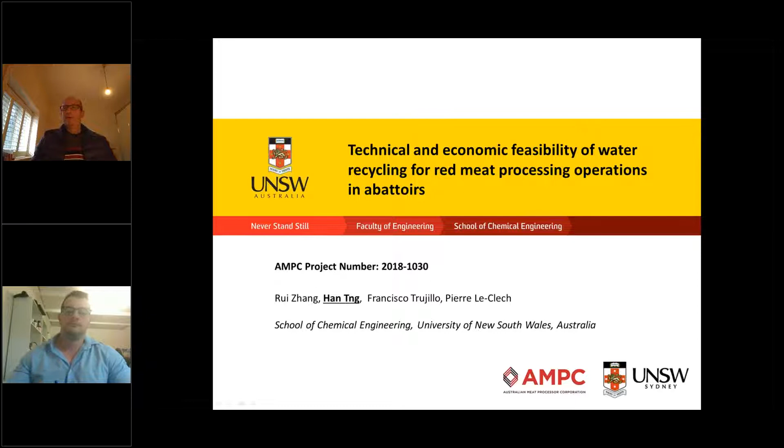So our first speaker is Dr. Han Tng, so I'll hand over to Han. Thanks, Matt. Hey everybody, I'm Han from UNSW, and I'm presenting some of the findings and outcomes from our project, which looked at the technical and economic feasibility of water recycling in red meat processing abattoirs.

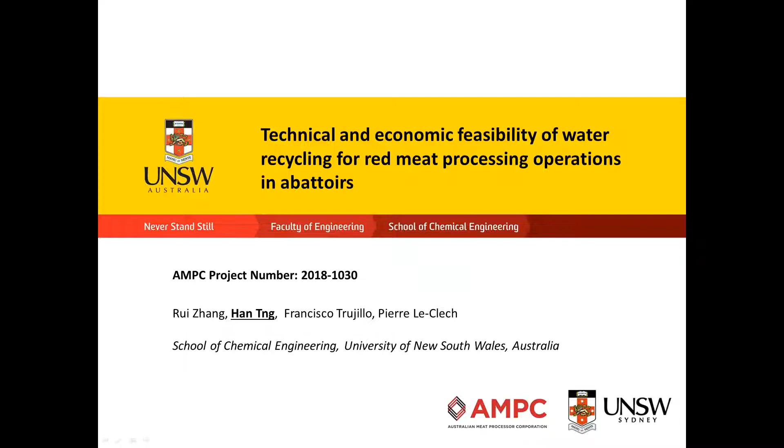The Australian red meat processing industry uses large quantities of water to maintain high levels of sanitation. Potable water is used throughout the various stages of meat processing, ranging from washdown of stockyards all the way to rinsing of final meat products. Due to this, in times of drought, meat processors are often perceived as overusers of water, increasing potable water costs and thereby increasing tensions between red meat processors and the local community over consumption of potable water.

Therefore, the aims of this project are to provide red meat processors with recommendations to reduce potable water consumption via the identification of waste streams suitable for recycling or reuse, as well as assessing its technical, environmental, and economic feasibility.

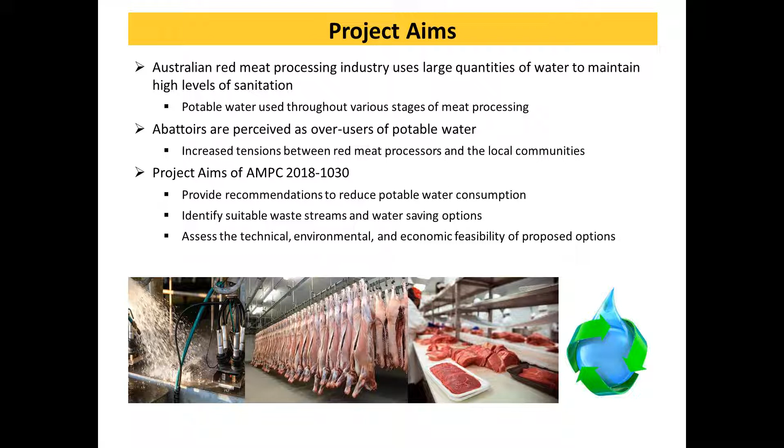The project was broken down into four milestones. Milestone 1 was first to collect abattoir operational data to establish the current volume of potable water consumed as well as its costs. This was achieved by a survey sent out to participating processors, as well as site visits and interviews. Milestone 2 was then to identify the quantity and quality of the abattoir waste streams before selecting streams most suitable for reuse or recovery.

Milestone 3 then looked at pairing the selected waste streams with proposed treatment trains to assess their technical feasibility through microbial risk assessments, BioWin, and WAVE RO modeling. Milestone 4, the last milestone, was then to assess the economic and environmental feasibility, achieved through a comparative life cycle assessment as well as net present value and ROI assessments.

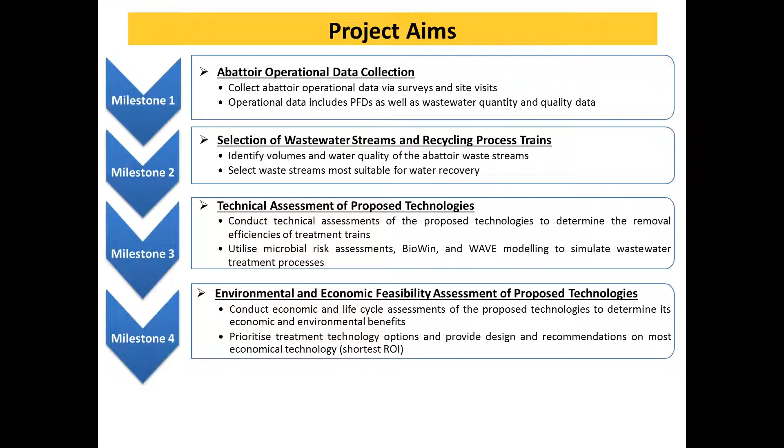As previously mentioned, Milestone 1 looked at data collection through a survey as well as site visits and interviews. Through the site surveys, we collected operational data such as potable water consumed on site, together with economic information such as trade waste and potable water costs. Visits and interviews with abattoir personnel were also used to collect process flow diagrams, piping and instrumentation diagrams, and site-specific information.

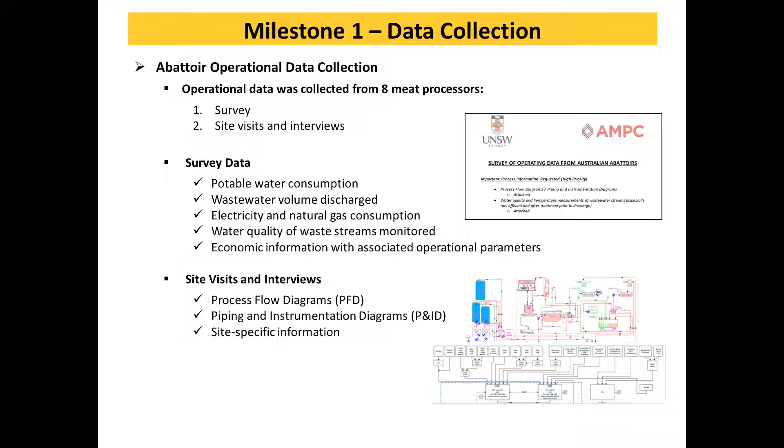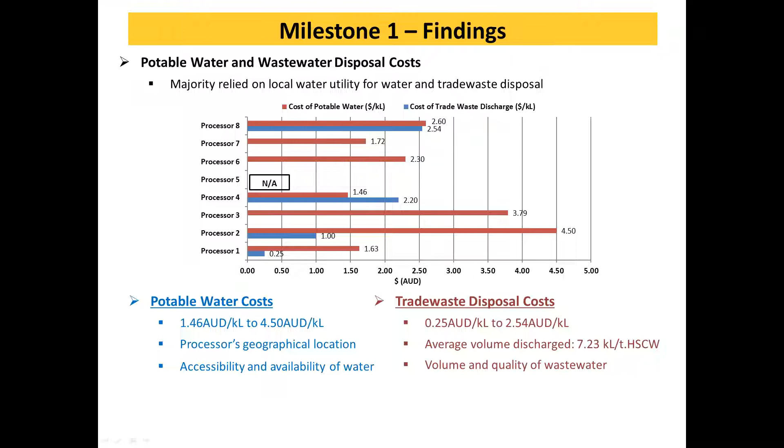From the interviews with participating processors, it was clear there were growing concerns regarding the increasing cost of potable water due to decreasing water availability. This highlights the need to explore water reuse and recycling options, where every percent of water saved counts significantly. Recovering 1% of water will save approximately 9,600 kiloliters a year, which amounts to $28,000 at the current potable price of $2.98.

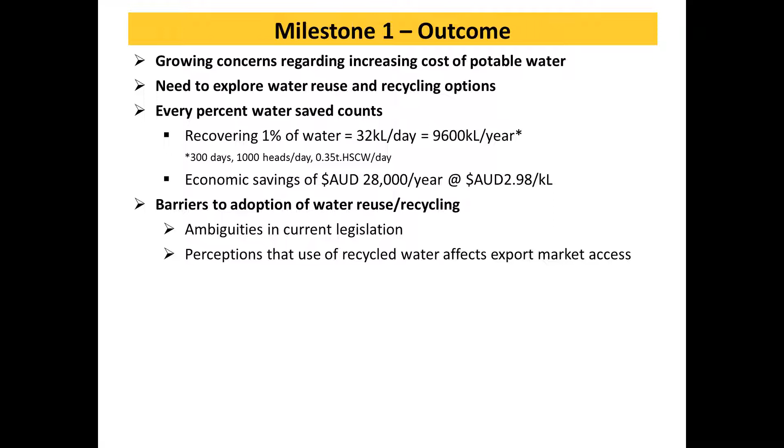However, from our interviews we also noticed there's a massive barrier to the adoption of water recycling and reuse, due to inconsistencies in the current legislation, resulting in a perception that processors' export market access would be affected should they choose to use recycled water in their abattoirs. That's most probably the reason the industry is reluctant and hesitant to consider water recycling or reuse.

So we actually reviewed the relevant legislations: AS 4696, the Food Standards Meat Notice 2008, the MICOR from the Department of Agriculture, as well as Codex. There's no evidence that recycled water is prohibited in meat processing, as long as they comply with the Australian Drinking Water Guidelines.

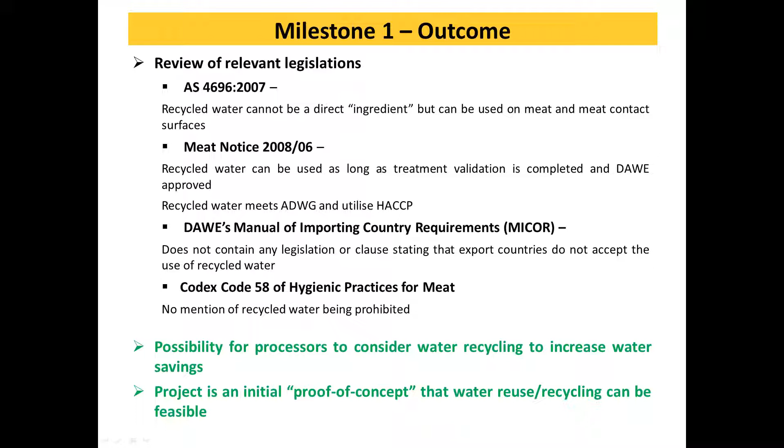This further highlights the possibility for processors to consider water recycling to increase their water savings and improve their water stewardship. Findings from this project can also act as a proof of concept that water recycling is technically feasible, as long as they stay compliant with the relevant legislation.

Moving on to Milestone 2. Milestone 2's aims were to quantify the volume of wastewater produced by each abattoir process, establish the water quality of those waste streams, as well as select waste streams most feasible for reuse or recycling.

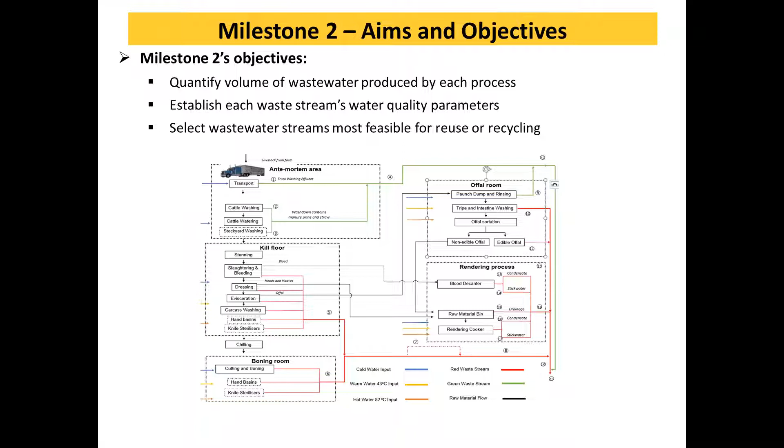As you can see from this process flow diagram, there are many different waste streams generated from an abattoir process. We faced a few limitations and challenges, one being that abattoirs do not properly meter their water or their processes, so it's difficult to actually collect water quality data as well as flow data.

Wastewater generated from individual processes was not segregated; often they were commingled and sent down the same drain. As such, only limited water quality parameters were monitored, and most of it only focused on the treated effluent for trade waste and disposal compliance.

As part of Milestone 2, we had to review the data collected from Milestone 1 and look at existing literature and previous studies to fill the gaps, before starting step 2: ranking the waste streams based on volume and water quality. We wanted to focus on streams high in volume and low in contamination, as those are easiest to treat and have the most opportunity for reuse and recycling.

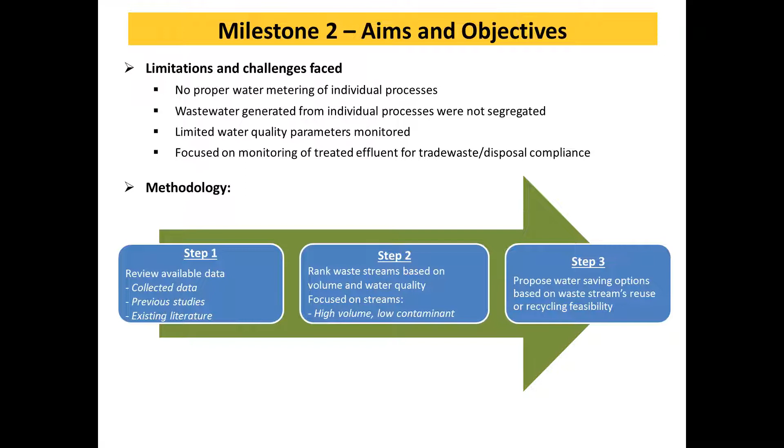So we ranked all the waste streams from the different processes in an abattoir. This ranking identified the kill floor as the largest producer of wastewater, contributing 27% of the total wastewater produced, followed by the stockyard wash and combined stick waters. However, of these three, only the kill floor waste stream was deemed suitable, due to its contaminant strength.

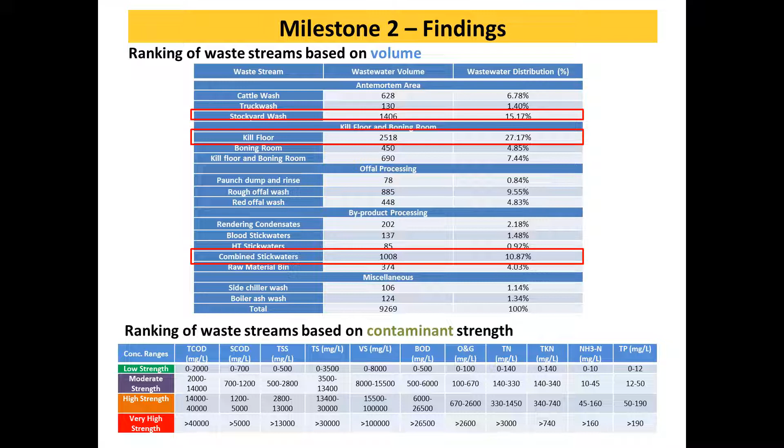And that's what we actually developed, a ranking system to basically score each individual stream based on its volume and strength. From the scoring system we developed, we ranked and found that the top 4 streams most feasible for reuse or recycling were the boning room, side chiller wash, kill floor, and boiler wash waters. The full ranking and more details can be found in the AMPC report.

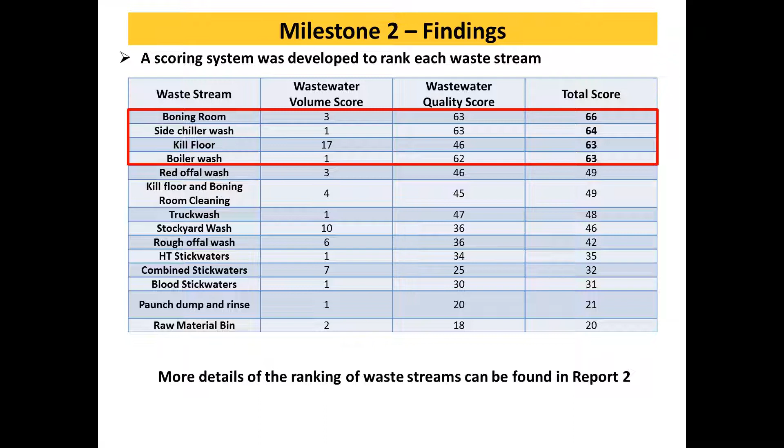So with the waste streams selected from Milestone 2, Milestone 3 was then to propose and select 3 water reuse or recycling options. The 3 options we proposed were: option 1, direct reuse with minimal treatment; option 2, recycle to a non-potable Class A standard; and option 3, recycle to potable water standards.

These options were then evaluated based on a quantitative microbial risk assessment to establish the log removal values required for treatment, as well as a multi-criteria assessment to select the best treatment train for each option. 2 modeling softwares were used as well: BioWin and DuPont WAVE, to help determine the removal efficiencies of the treatment processes.

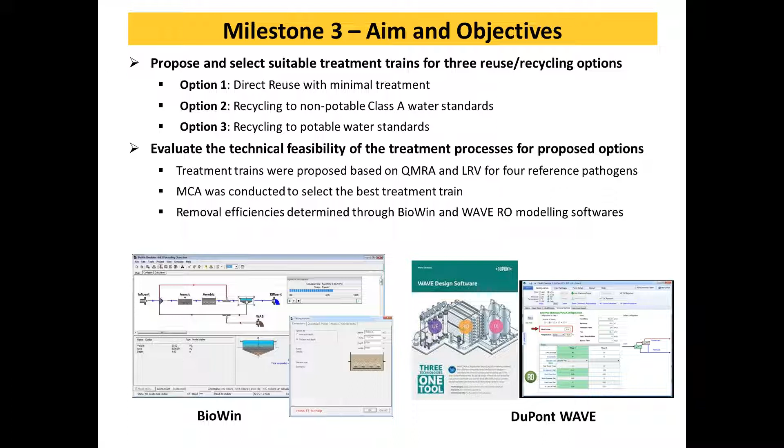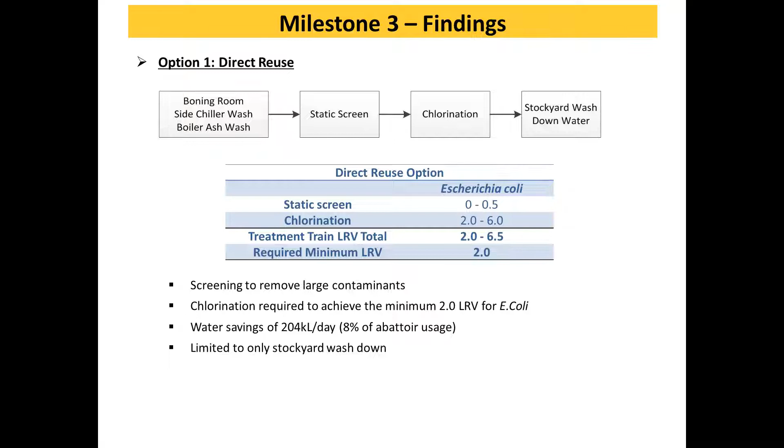Option 1, direct reuse, looked at reusing wastewaters generated from the boning room, side chiller, and boiler wash directly as stockyard washdown water. Given the low amount of contamination in these streams, the process only required a screen for removal of large solid contaminants, followed by chlorination to achieve the minimum 2 log removal values for E. coli. This option could yield savings of about 204 kiloliters per day, about 8% of the abattoir's daily usage. However, this has limited use as it can only be used as washdown water in the stockyard, so it cannot be used anywhere else.

Option 2 was to treat the kill floor wastewater to a Class A non-potable standard, achieved through a membrane bioreactor and chlorination as the final disinfection step. Briefly, conventional activated sludge is used for nutrient removal, followed by a solid-liquid separation step by settling. An MBR, on the other hand, which is what we propose to use, essentially combines the conventional activated sludge and settling process into one using ultrafiltration membranes as well. This not only reduces the process's overall footprint but also improves the pathogen removal efficiency, allowing the treatment train to achieve the required LRVs for non-potable Class A water production.

It should be noted that while MBRs are more compact and efficient, they are also susceptible to oil and grease. Therefore, proper water quality sampling will be needed prior to adoption of this technology. A potential way to solve this issue was to have a save-all tank used upstream of this treatment process for flow balancing as well as removal of oil and grease.

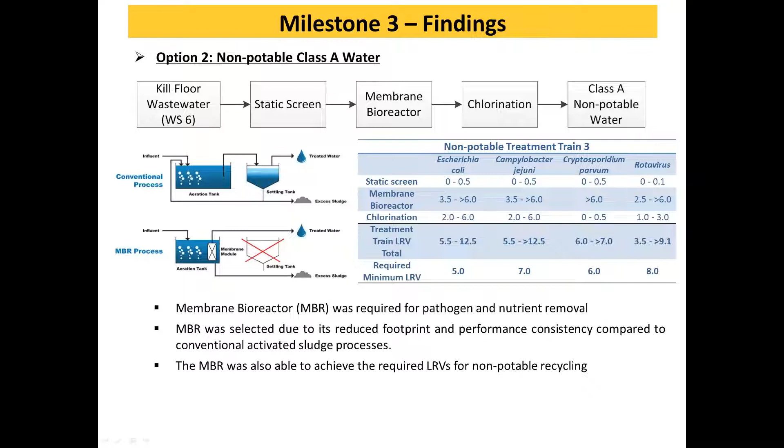For option 2, we used BioWin modeling to simulate a membrane bioreactor to establish its removal efficiencies. The modeling results demonstrated that an MBR was capable of producing non-potable Class A water. As you can see, the MBR effluent achieved the Class A standards, in fact surpassing them for BOD, total suspended solids, nitrogen, and phosphorus. This treatment train was capable of producing 719 cubic meters a day of Class A water that succinctly met the abattoir's non-potable needs.

Although this option can yield significant water savings, it's limited to processes that utilize Class A water, which tends to be washdown waters as well as other plant amenities. Therefore, it does not have as much utility compared to potable water.

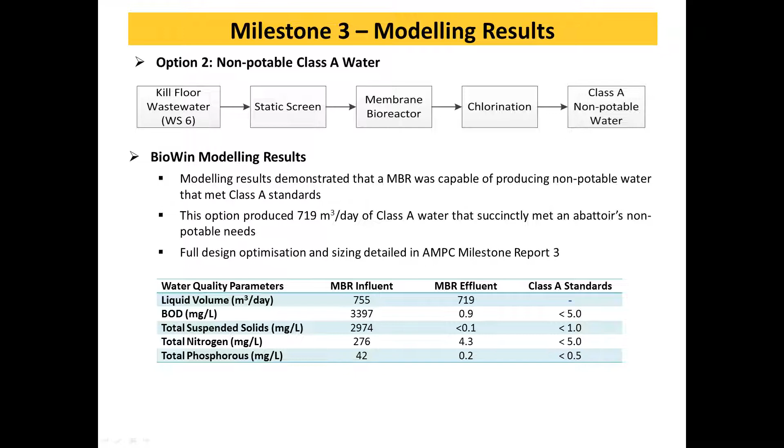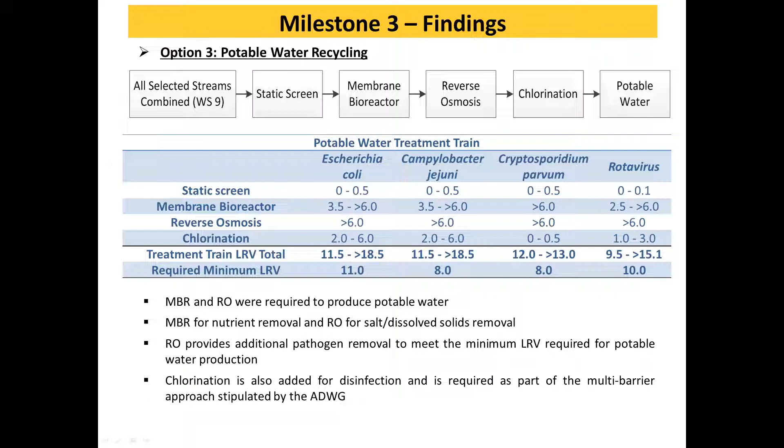Option 3 was to recycle all the selected waste streams to potable water standards. Again, that involved the use of an MBR for nutrient and pathogen removal, followed by an RO membrane for dissolved solids removal. The RO unit also provides an additional barrier to pathogens, enabling the treatment train to surpass the minimum required LRV for drinking water. This is also part of a multi-barrier approach, required by the Australian Drinking Water Guidelines, with chlorination also used as the final disinfection step.

Again, we used BioWin modeling to show that the nutrient removals were achieved, and the WAVE RO modeling software was used to design and size an RO system. The modeling results showed that to achieve a recovery of 88%, a two-stage RO system with concentrate recirculation was required, and that was able to produce 1,023 cubic meters a day of potable water, which accounts for close to 32% of an abattoir's daily potable water requirements.

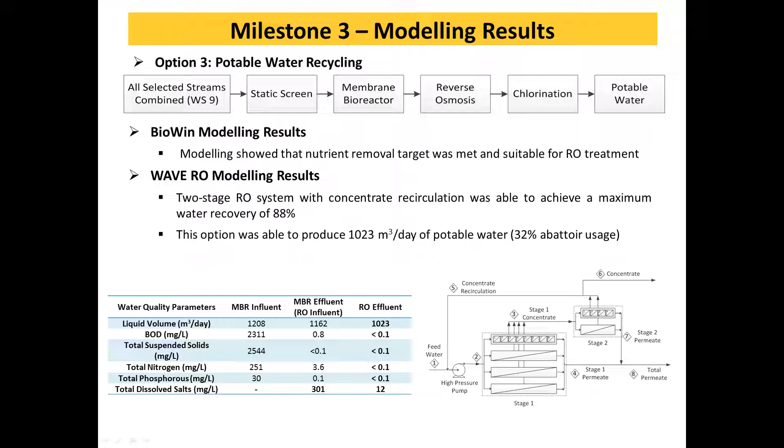Given that potable water can be used in a wide range of abattoir processes, recycling wastewater to potable standards would allow processes to achieve the most significant water savings. So with recycling waste streams to potable standards being the best option to achieve significant water savings, a comparative LCA was conducted to evaluate the environmental impacts attributed to the adoption of potable water recycling.

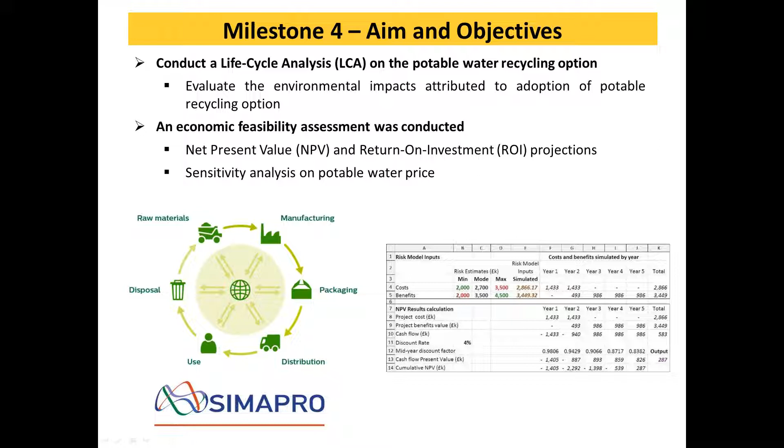Subsequently, an economic feasibility assessment was conducted to assess the economic viability of the water recycling options, where a net present value over a 15-year time period with an ROI projection advised on the capital payback period. A sensitivity analysis was also conducted to look at the impact of potable water prices on the projected NPVs and ROIs. As part of milestone 4, we looked at 3 different scenarios.

Scenario 1 was the base case where no recycling is considered. Scenario 2 was the case where internal recycling was adopted, involving treating the selected waste streams via the proposed MBR and RO unit to produce potable water. Scenario 3 was the case where end-of-pipe recycling was considered, which differs from internal recycling in that the abattoir's wastewater is first treated by the local utility's wastewater treatment plant for nutrient removal, followed by an additional ultrafiltration and RO membrane used to treat the water to potable standards and recycle.

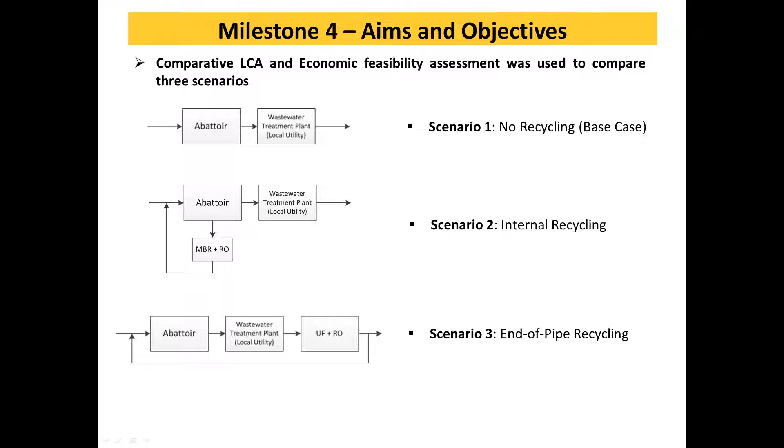Very briefly, the comparative LCA assessed each scenario across 10 different environmental impact indicators. A decrease in impact score indicates an environmental benefit, while an increase in impact score indicates an environmental burden. Changes in impact scores that exceeded 10% were deemed significant, with anything less than 10% considered insignificant and not considered in the study.

Based on our results, internal recycling showed significant changes in 6 impact indicators, while end of pipe resulted in 4 significant changes. Regardless of recycling configuration, recycling of water generated an environmental benefit for 2 impact indicators: mineral resource scarcity and freshwater consumption, which was obvious due to the reduction in water extracted from the environment and the subsequent impact.

However, internal recycling did contribute to more of an environmental burden due to the increased energy consumption and sludge production associated with the use of the MBR for nutrient removal. End of pipe, on the other hand, did not have that because it relied on the conventional wastewater treatment plant run by the local utility for nutrient removal.

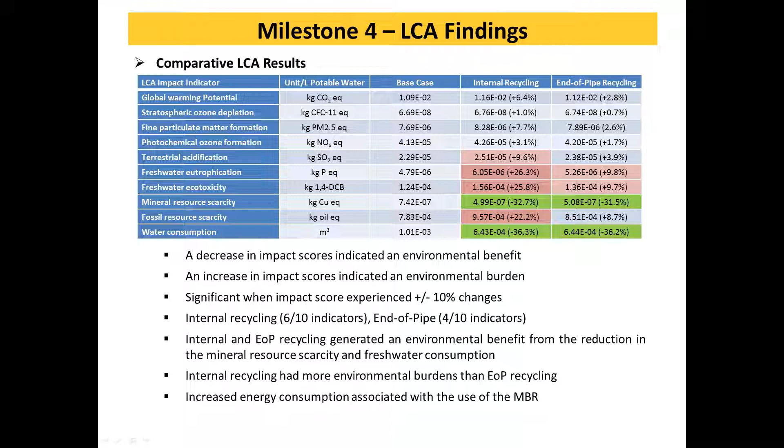Moving on to the economic feasibility, the total capital investment costs for both internal and end of pipe recycling were estimated based on CapEx values obtained from wastewater treatment case studies. Working capital was assumed to be 15% of the fixed capital investment. The total CapEx for internal recycling was estimated to be close to $3 million, while end of pipe recycling was found to be around $1.7 million. This shows that internal recycling was more capital intensive as it required a dedicated MBR for nutrient removal.

However, this translated to a reduction in operational expenditure due to lower trade waste disposal volume. As you can see here, when it comes to operational expenditure, internal recycling had a lower OPEX of around $400,000 a year compared to end of pipe's $820,000 a year. Again, that was due to the fact that internal recycling was not reliant on the utility's conventional wastewater treatment plant, and hence we were paying less for trade waste treatment.

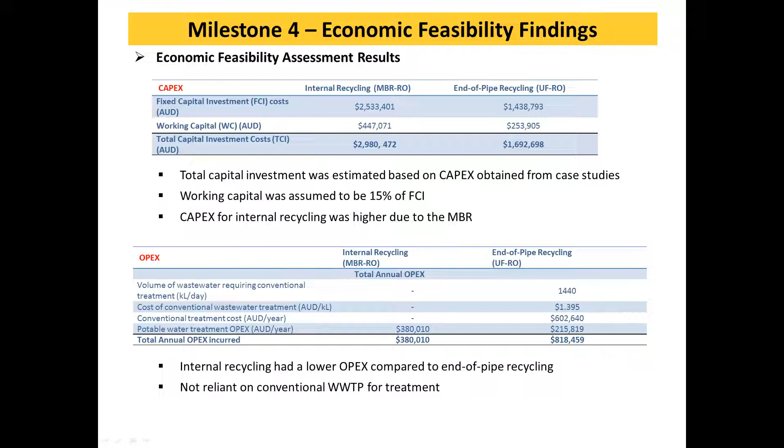As part of the net present value and ROI projections, the financial savings from the reduced volume of potable water purchased from the utility was considered as a revenue stream, amounting to close to $1 million a year at the current potable water price of $2.98 a kiloliter. From the survey data, it was clear that potable prices could range from as low as $1.45 all the way to as high as $4.50.

As such, a sensitivity analysis was developed to look at the effect of potable water price on NPVs and ROI of the 2 options. Sensitivity analysis showed that at a current average price of $2.98, internal recycling was more feasible than end of pipe recycling, achieving a capital recovery after 8 years at an ROI rate of 10.2%. The end of pipe recycling scenario did not achieve capital recovery after its 15-year lifespan. However, when potable prices are high at $4.50, both options were economically feasible, achieving a capital recovery after 5 years and ROIs of 23% each.

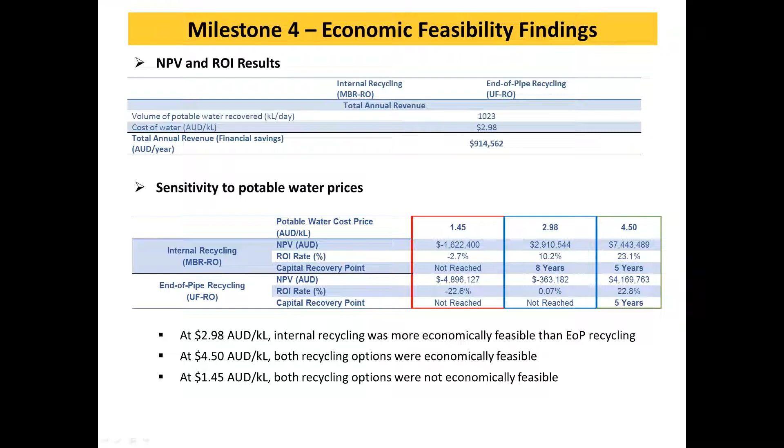So in conclusion, the project has proposed 3 options, with recycling to potable water having the greatest utility, thus allowing the processors to make the most of water savings.

However, there are a few issues that need to be addressed prior to the adoption of potable water recycling. First, abattoirs need to have proper water metering as well as segregation of their waste streams. This will allow us to properly quantify and target the specific waste streams.

Existing abattoirs should consider retrofitting their plumbing, while greenfield abattoirs should potentially consider proper hydraulic planning to allow for access to these individual waste streams and to minimize cross-contamination between them.

The next issue, which is probably the biggest issue, would probably be the legislative market access barrier. As mentioned before, there is no legislation or clause that prohibits the use of recycled water in meat processing, as long as the treatment process is validated and approved. Therefore, further consultation with the relevant industry stakeholders and health regulators are required.

Potentially, pilot testing of the proposed potable water recycling treatment trains is recommended as a proof of concept, and also to allow for technical validation of the treatment process and final product water quality monitoring.

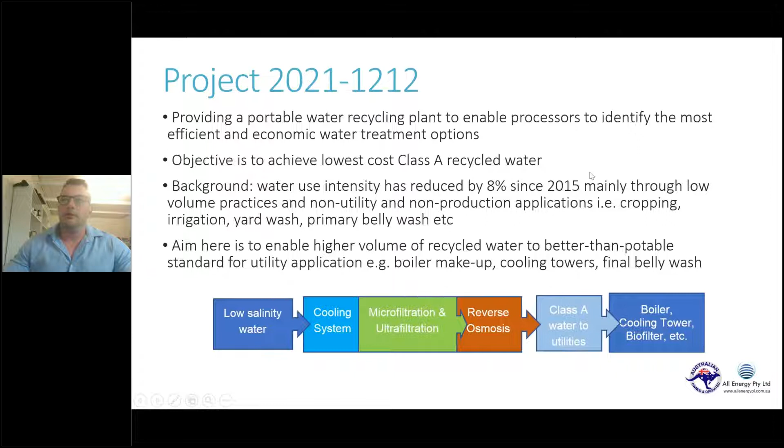Gareth will talk a little bit now about the sources of recycled water we've been looking at so far within the plant. So I'll hand it over to Gareth.

Thanks, Max, and thanks, Amanda and Madden, for the chance to talk today on a pretty exciting area of water recycling. Han gave some really great background information and motivation there for increasing potable water, and even those increasing trade waste costs for red meat processors that are paying invoices to water utilities, which is quite often associated with the volume of the water and also the composition of the water.

So the one that we're really hitting here is that volumetric charge on trade waste, in addition to reducing the volume of potable water required. When you have a look at all of the water streams going around a red meat processing site, quite often there's almost a binary approach of that potable influent and then the used effluent.

If you look at water use as more of a continuum, you have the very high quality water, such as the reverse osmosis water currently going into boiler makeup or the cooling tower, through to your potables. Then you might have bore water with a high TDS, and then things like reuse water, belt press wash water, cattle wash water. And then you start to move into your effluents.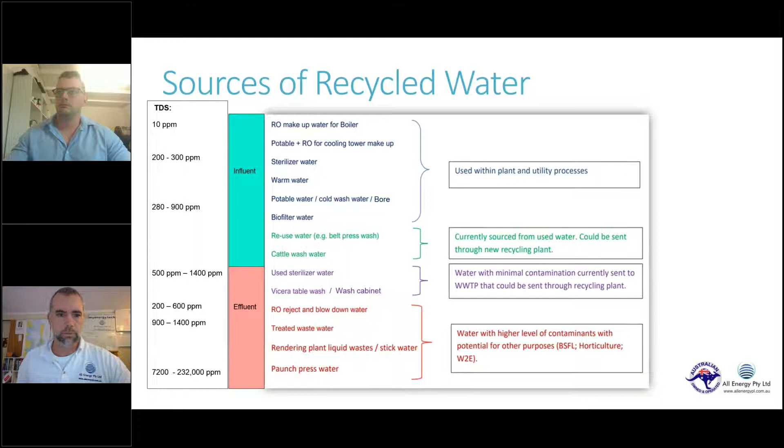So that gives you an equivalent index of 1.14 of low salinity water, which only needs physical filtration to be taken up into higher quality water, such as those used throughout various utilities. We look at different streams on the utility side: cattle wash water and other hard surface washdown water, biofilter makeup water, cold reuse water, evaporative towers.

This is quite an interesting one when you look at some of the innovative technologies coming through around dry cooling or adiabatic coolers, which are dry coolers with wetted pads for those times when the dry bulb temperature doesn't give you the cooling you need. There's a pretty exciting opportunity for red meat processors to dramatically reduce the volume of water used in evap towers. So hence...

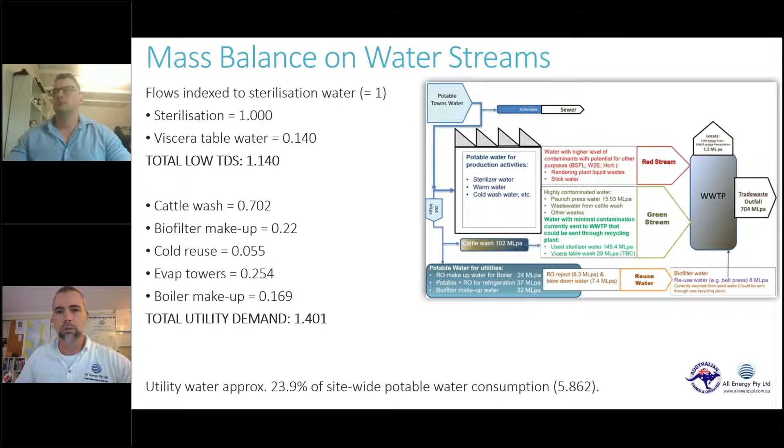Moving on to the next slide, we'll talk through the main technologies to be included as part of the pilot: microfiltration, ultrafiltration.

So this is effectively the first step before reverse osmosis. It is a sterilising process due to the ability to physically remove those microbes. You do have quite high recovery of the water, but you do need some water for regenerating or cleaning those filters.

One of the challenges within red meat processing is the build-up of fats, oils, greases, hair, and other particulates. So you have backflushing, chemical treatment, and as part of this pilot we're looking at things like Y-strainers and basket strainers to prevent clogging of these membrane systems.

What's the punchline on this? You're looking at about 50 cents total cost of ownership, including CapEx and OpEx over the life of plant, per kilolitre produced. So you can see why at these reasonably low total costs of producing water, there's a very high interest to start reducing potable water usage.

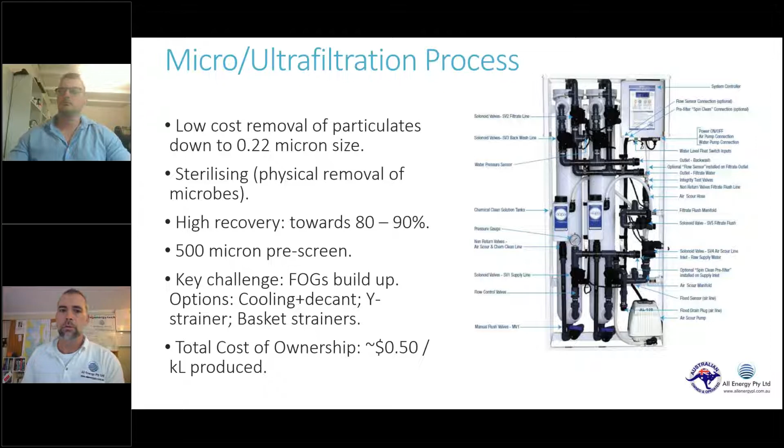Then if you move on to the next slide, after you've done that microfiltration and ultrafiltration, we're looking at reverse osmosis. RO was not going to be included initially in this project, but the feedback we had was the difficulty in segregation, and picking up on one of Hans' points about the opportunity around those plumbing retrofits and segregation of waste, thinking more of that continuum of water quality rather than just inlet or outlet. From that feedback, sites said it's pretty hard to get segregation of sterilisation water, so hence RO is considered for that end-of-pipe recycling.

As mentioned, that tertiary treated, advanced treated water may be up around 1,000 to 2,000 ppm, so you've really got to desalinate that water for it to be useful within utilities, hence the need for RO. The negative things about RO: you do need a lot of regeneration water, so you may only get towards 50% recovery.

And when you look at the total cost of ownership, due to the higher CapEx for the RO modules, plus OpEx from pumping and more chemical cleaning, it comes out to about $1.50 per kilolitre over the life of plant. So if your potable water plus volumetric charges are higher than this number, it's certainly worth pursuing. That gives the technical background on the project.

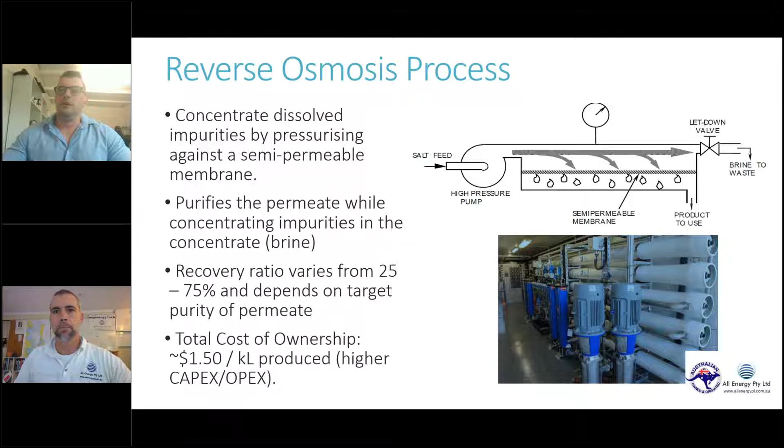I'll hand back to Max now to give some more details on the actual pilot. The current pilot project we're running is a 20-foot containerized micro and ultrafiltration with an RO system, along with 2 by 25 kilolitre buffer tanks. The plan is to provide 3 pilot plants shared between 9 plants, with 9 months at each site, including delivery, installation, commissioning, training, operation, demo, refurbishment, and removal, but with an actual operating time of around 1 week per stream of interest, however many you may have identified at your site.

So an expression of interest has been sent around already. If you have not received this and are interested in participating, just get in touch with me and I'll send it over to you and we can have a chat about what available waste streams you might have.

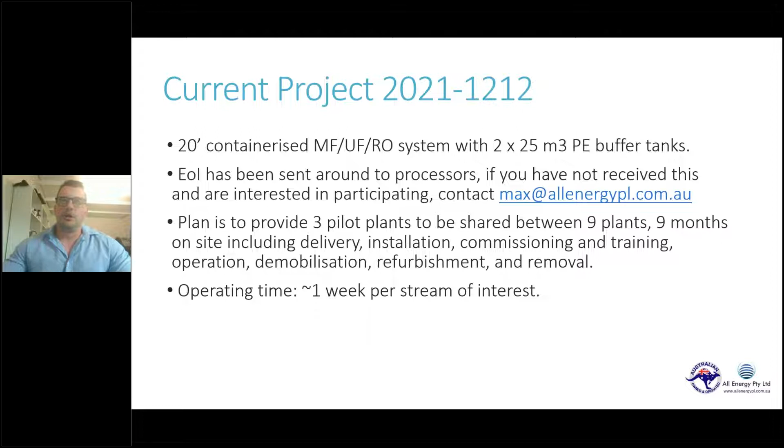Some suitable streams to help identify if this would be something you could host at your site would be things like sterilizer water—at the few sites we've been to so far, this has been the main one we've identified—sterilizer hand wash water if it might be mixed together, viscera table water, bore water has been surprisingly attractive, wash cabinet water, and tertiary wastewater treatment plant effluent, so things coming out of a DAF, ideally without chlorine dosing, or any sort of recycled water currently stored on site.

Essentially what we're searching for is just the lowest dissolved and suspended solids, the lowest fats, oils and grease, and the lowest microbe content—basically the least cloudy recycled water you might have on site. Ideally up to about 100 cubic meters per day to feed the pilot, which would produce approximately 50 cubic meters of actual recycled water.

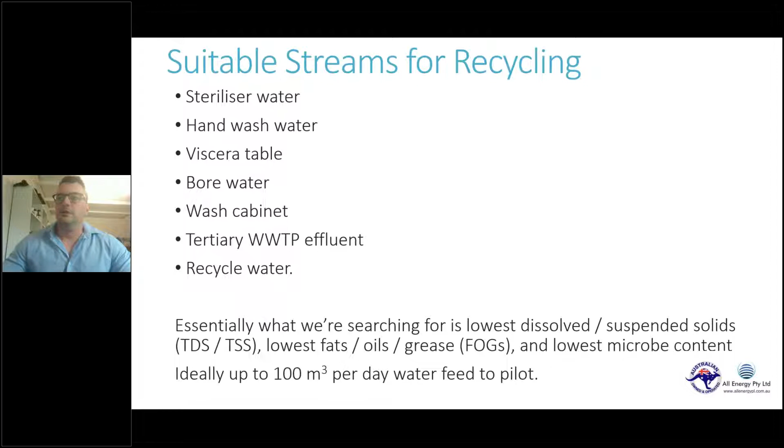So I'll send it back to Gareth to talk about the process flow diagram we've developed and some of what that system architecture would actually look like on your site, and then I'll talk a little bit more about some of those more detailed requirements for participating.

Thanks, Max. I won't dwell on this too long, but it just gives you a sense of the opportunity. Sterilisation water is too hot for sending into polymer membranes. The target temperature is 35, so we'll have a pre-cooling and product reheating heat exchanger, which helps recover the heat of the system back into, for example, the thermal well or the boiler header tank.

Then another trimmer heat exchanger and a final dry cooler to take the temperature off, with a buffer tank in there to ensure there's enough volume and to steadily work through the water as it's available.

As we look through the process: microfiltration, ultrafiltration, so about 80% of that filtered water going into the breaker tank, 20% used for flushing and cleaning. Then that filtered water goes into the reverse osmosis system.

And when you look at the total, about 50% by volume of that water will go to the existing wastewater treatment plant, and 50% can then be reheated via the heat exchangers and sent over to the boiler header tank.

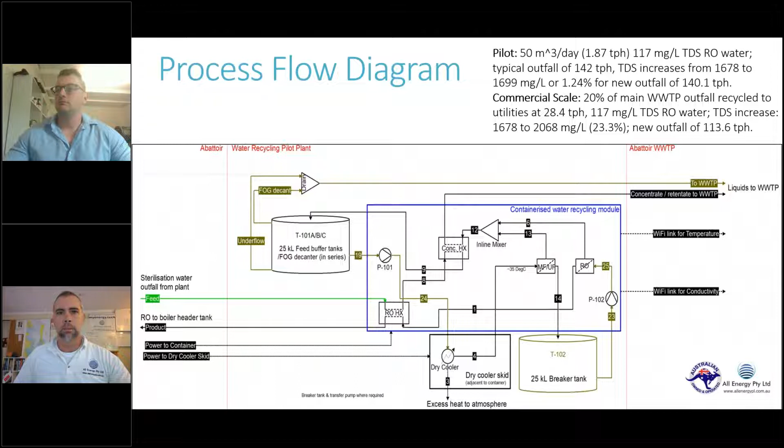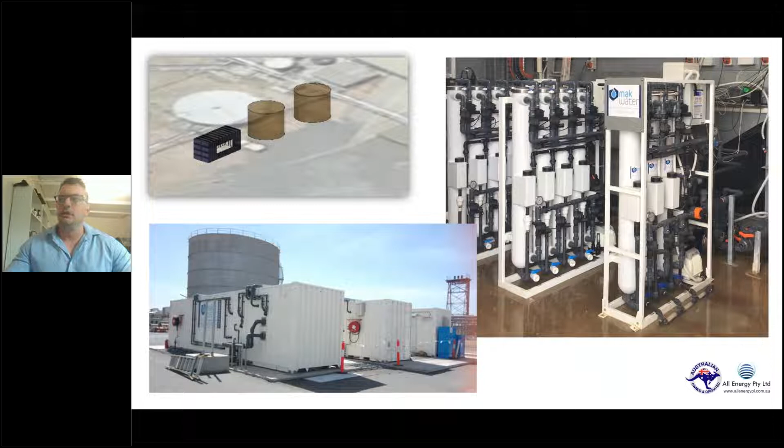...just any sort of water recycling sustainability targets you might have from within your plant, any sort of past projects or feasibility studies or anything like that you've done on water recycling, basically how familiar you are with water recycling, available hydraulic diagrams, process flow diagrams, that kind of thing of your wastewater treatment plant will basically just help us to plan out and be more efficient with sampling and where we fit this in.

The commitments from you would be being able to allocate personnel resources of about 20 minutes a day for visual inspection and inlet-outlet metering. We will have some online metering, but there might be a little bit extra we might need to ask of you.

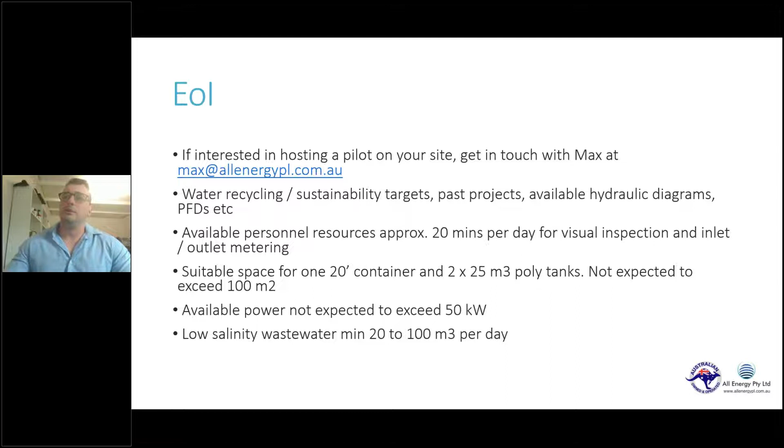Suitable space for the container and the 2 by 25 meter cube tanks, so as I mentioned, not expected to exceed 100 meters square. Available power in the tens of kilowatts, it's pretty low tech, not expected to exceed 50 kilowatts. And the critical one is just having the wastewater available, so low salinity wastewater, minimum 20 up to about 100 meter cube per day would be great if you could make that available for us.

So were there any questions? I can't see the chat, but... Yes, were there any questions?

Got some questions through on the SMS while the presentations were going on, so I'll go through those in a minute. I just noted at the end of your presentation there that the EOI process for the water recycling pilot actually goes through the co-innovation managers first, and most members will have already done that. So we'll be sending those applications via the co-innovation managers over to you, so you can start your process around interviews, etc. There might be some laggards, but they should contact their co-innovation manager, and if they're interested, you'll get to see them after that. So thank you very much to both sets of speakers today.

It was really good the way one flowed to the other. We've had a couple of questions come through on the SMS, so I'll go to the first one. It's around the MBR that Han talked about. Han mentioned that the MBR needed to have a DAF pre-treatment. Could the MBR unit be replicated with a more economic alternative to achieve Class A?